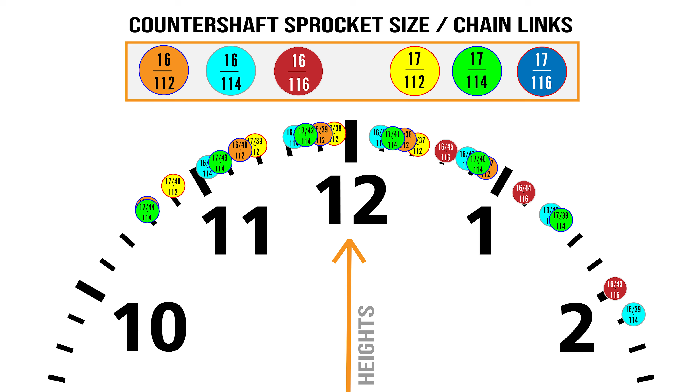You can change your gearing, because the rear axle is inside of an eccentric hub. On Superduke.com you can look at all the data sheets that I have for the Gen 3 and the Gen 4 on how changing the position of that rear axle, because it's on an eccentric, will also change the rear height of your bike. So you could theoretically, I don't have the Gen 2 mapped up. I probably should do that. But I got enough projects right now that I'm never going to make $1 from. So let me just get through this first, right?

So by changing the position of that rear axle, you're also raising and lowering the rear of the bike. And the way the bike comes stock is at the lowest in the rear that it can be. And then if you got a longer chain, I think it comes at a 112. If you got a 114 link chain, don't even change your sprockets. You'd have to turn the axle back more. And as soon as you start going back, you also go down. And when the axle goes down, the rear height goes up, because the axle is connected to the tire, which is touching the ground. So the axle is never going to get closer to the ground. It's directly connected. So the bike goes up and down above the axle.

So if you want to adjust, you can change your trail that way. You can't change it a lot, a couple of millimeters, right? But you can make a difference. Well, it's worth a try, right? The only other way to do it is with adjustable offset triple clamps, which are trick as hell.

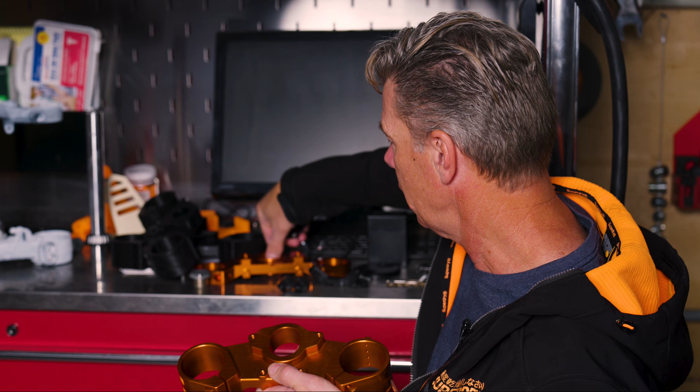So this is an insert. This is one of 7 inserts that fit this hole in the lower triple clamp. There's an equal sized insert that fits the upper triple clamp, but let's just show one side, right? So there's 7 different ones of these inserts that all have this hole in a different place inside of this oval. So when you change the placement of that hole, well, actually, the oval sits like this, right? I made it so you can read the numbers, the offset that you have underneath, because that's where you view it from the bike, right?

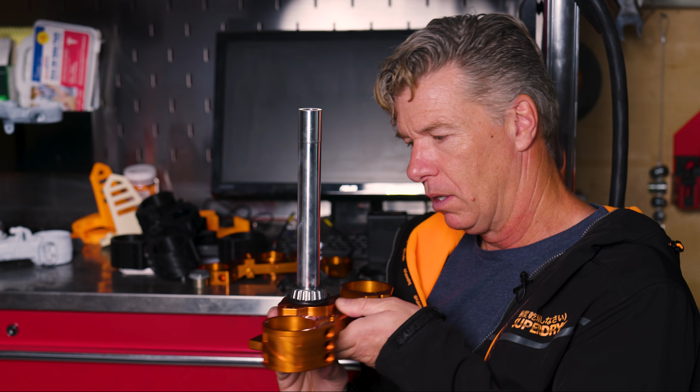But so if the insert goes in like this, your steering stem goes into that hole. See like that? Now, this is your offset. If you could draw a line through the middle of this fork and the middle of this fork, there will be a line going straight across, right? Then if you could draw another line parallel through the middle of this steering stem, the offset is the distance between those 2 parallel lines.

And the offset of your triple clamps has a huge impact on how your bike responds to you, how the bike feels, because your offset affects your trail. So you can have a motorcycle, right? I do it with my fingers. You can have a motorcycle that's sitting on the pavement, on its wheels, and that's its attitude, right? The chassis, like if you drew a line through the whole chassis, that's about where it is. If you jacked up the rear, like this, now that's the attitude of the chassis, and it's kind of aggressive and it's more leaning forward.

When you put a sport link on a Superduke, you increase the rear, you make it a little more aggressive. When the bike is a little more aggressive like this, when the attitude is a little steeper, when you have less trail, the bike responds easier to you. It responds without fighting you.

Okay, so people rave about how the Tuono handles. People rave about how the KTM RC8C handles. Ducati's winning World Superbike and MotoGP, they're just dominating everything. And their new Superbike, the street bike, the Panigale, whatever the hell it is, people love the way it handles. You know how much trail it has? 98 millimeters of trail. And the RC8C, 99 millimeters of trail. And the Tuono, I think it's 100 or 101. All the bikes that people are raving about the way they handle are all around 100.

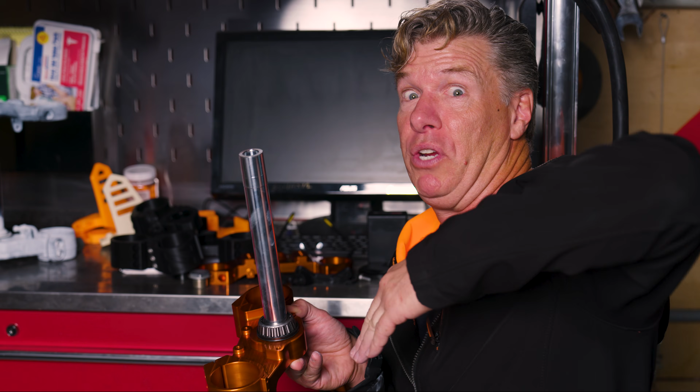So now we're in a situation where we can, where did all this stuff go? With our adjustable offset insert, we can change where the steering stem is relative to where the forks are, and that's changing our trail. The bike doesn't have to go down. No more do we have to have the chassis on this angle, or the rear of the bike so high. If that was the only way to adjust your trail, people with shorter legs could never ride a bike with less trail because they could never reach the floor.

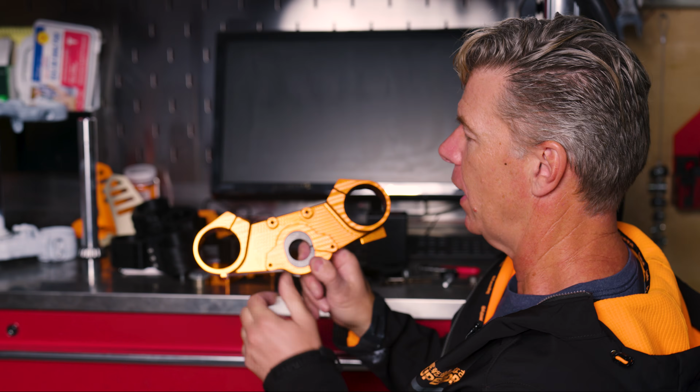So now, people with shorter legs, you can change the trail just by changing your offset. So when you do that, you can even look at this offset closely. This offset says on it +2 and OEM. So if you put this up, I'll put it in upside down. If you put it in like this, okay, plus means like I made plus, where it's like increased performance.

So +2 is adding 2 millimeters to your offset, which, it's opposite, reduces your trail 2 millimeters. That's why I make a plus, because it's like performance, like you added performance. You just made the reactions of your bike beneficial, like it's a positive 2 millimeters. But if you take this out and flip it over and put it back in, you just change the location of that hole.

I think the +1 insert, the hole is exactly in the middle of the oval. So it doesn't matter if you put that in like this or like this, it only has one offset because that's the way I designed it to be. So then there's the +2, +3, +4, +5. There's like 7 inserts, and most of the inserts have 2 positions. You just rotate it around. So that's really, really cool and really advanced.

And some people with a Gen 2 Superduke that understood what adjustable offset triple clamps do really wanted me to make Super Clamps for the earlier bikes, for the Gen 2. So I did an agreement online to say, if 10 people sign up, I'll make them. And only like 4 or 5 people signed up. And because I'm an extra idiot, I'm not just an idiot, I'm like an extra idiot, I created a sign-up sheet for people with the Gen 1 or Gen 2 triple clamps. Like anyone from 2014 to 2019, if you want a Super Clamp, I'll make one for you.

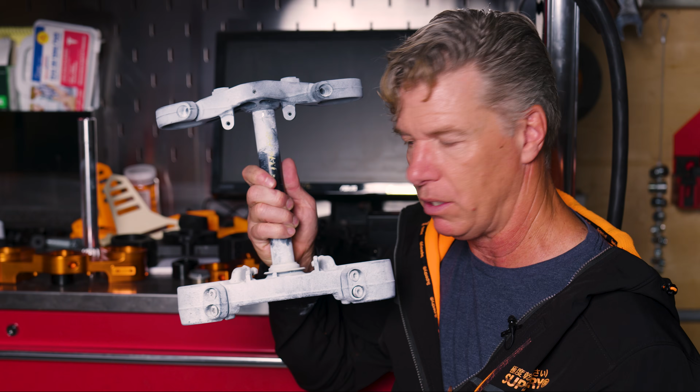Okay, so check this out. Look how different. This is a triple clamp for a Gen 2. What is this hole? What the hell is that? And these brackets. This does not exist. This is the Gen 3 and 4. There's no hole in the middle. Now, this is the Gen 1 triple clamp. There's no hole. Where's the hole?

For some reason, KTM, only in the 2017 to 2019, made the brake line go from your brake lever to here and bolt into the triple clamp. Fluid goes through the triple clamp, and then the banjo bolts down here, there's 2 of them. One goes to one caliper, one goes to the other caliper. So the triple clamps are an integral part of your brakes, of your brake lines.

So I said, well, if 10 people sign up for the Gen 1 and Gen 2, I'll make them. What a moron, because I have to make completely different Super Clamps for the first generation and then for the second generation. So I'm an idiot, but I also have some integrity and honor, and it was right for you to trust me because it was a pretty big leap of faith, and I both respect and appreciate you for it. And that's why I dedicated myself to make it happen. And here it has happened.

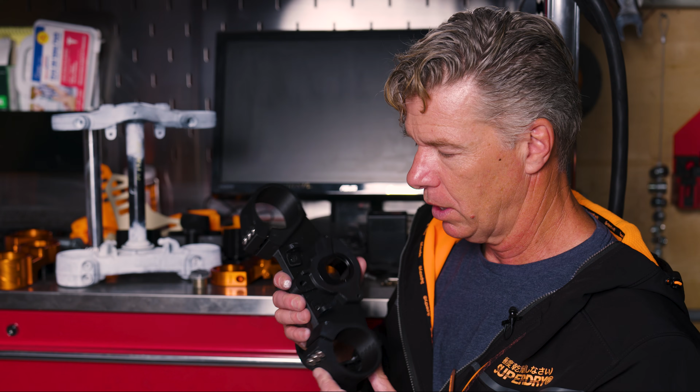So here is the Gen 2 Super Clamp. Here are the brake lines. I made this little piece here. So you put your brake line on, and when you tighten the banjo bolt, the shoulder of the bolt hits this little ledge, and this will hold it just like the OEM one has that little curve right there to keep the banjo from spinning.

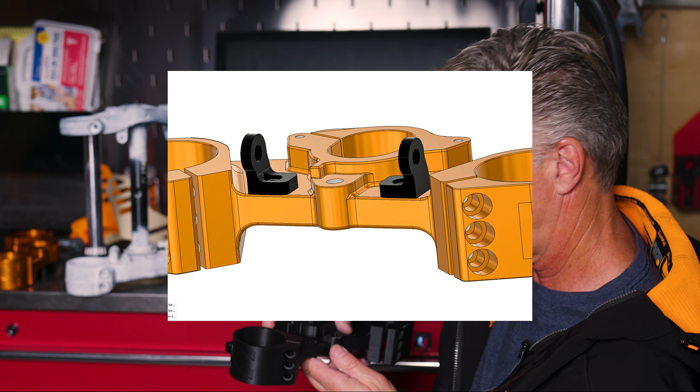Then if you also look, the Gen 2 has these brackets here that stick up for the headlight, right? The headlight kind of leans like this. There are these pins that go in here and help hold it, and then the headlight bolts in 1, 2, 3 places up there. So for the solution here, if you look at the triple clamp this way, it has to be machined out of a big hunk of aluminum.

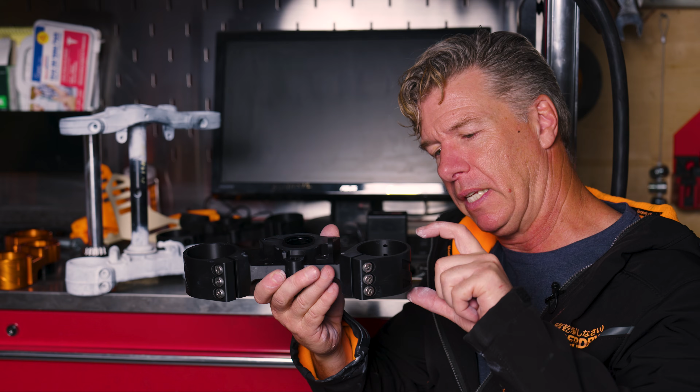So if it's just the triple clamp, the hunk of aluminum is only this big, and it's 7075 T6 aluminum, so it's expensive, strong aluminum. So this is the size, but as soon as you put these things here, oh boy, look how much bigger the block of aluminum has to be. And then you gotta mill all this material away, all that material is just for that.

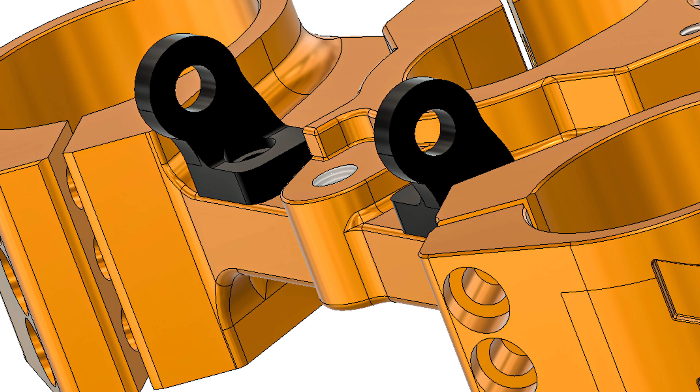So instead of doing it that way, I designed these little brackets that do it in 2 pieces. So there's a hole and there's a pin. You put the pin in the hole like that, and then there's a bolt. We just tighten the bolt. And now here's our little bracket for the headlight. Same thing on the other side. See the little pin and the hole? These are 3D printed. Don't worry, the real part is not 3D printed.

By the way, if you design things and make prototypes, you really should have a 3D printer, because when I made the original Superclamp, I had to pay $1,200 to get one lower and upper made, one. And it didn't really work that great. I had to make a lot of changes to the design, that David was so kind to help me with, to make it fit the Superduke, so I had to do that 2 times. And then I started making them out of wood myself. I probably made 30 Superclamps before I actually made one to sell. So now I can 3D print them and test fit them.

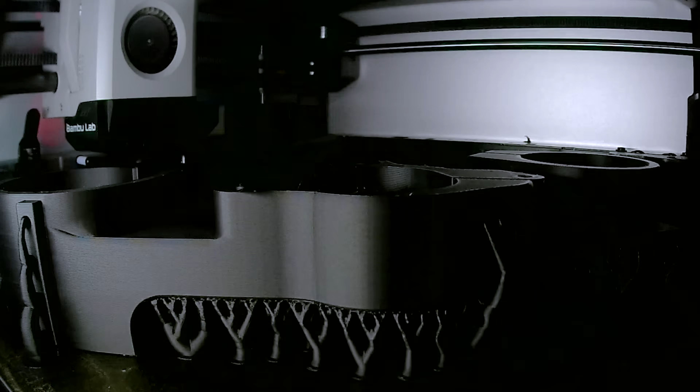So I have test fit this on a Gen2 Superduke, which Taco owns at Kawamoto. He's been helping me with some mechanical stuff and fixing my race bike, the Gen3. So this has been on his bike and it works. But what about the upper? The upper is tricky.

I really wanted to, and I emailed you guys, find a way to use the Gen 3 lower, the Gen 3 and Gen 4, modify it somehow, so that you would have a Superclamp for your Gen 2 that, when you sold the bike, you could take your triple clamp with you if you move up to a Gen 3 or Gen 4. Couldn't do it. It's too different. The brake line thing broke my balls.

So I would like to try to do the same thing with the upper, at least, right? So if you ever moved up, the idea was you could call me and be like, hey, I just need a lower for a Gen 3 because I'm moving up from a Gen 2 to Gen 3. And I'll just sell you a lower. So how am I going to do this?

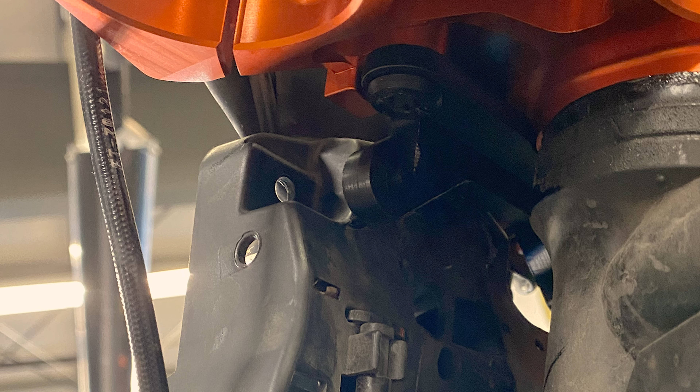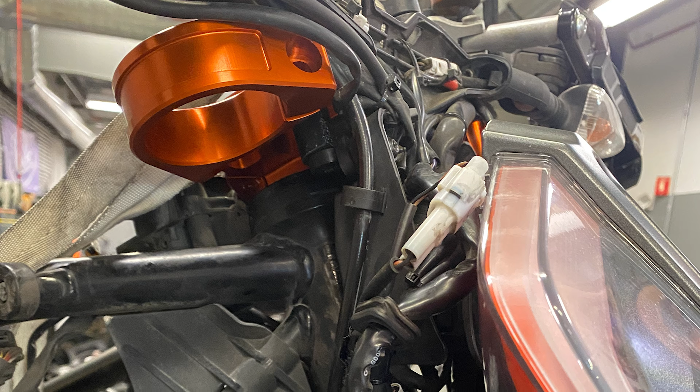The Gen 2 headlight bucket is like a black plastic dish or bucket that has all the wires and everything inside of it. And then the headlight goes in front of that, so you don't see the wires and all the ugly stuff. That little bucket goes onto the bottom of the triple clamp with these 2 little pins, and it works perfectly with these. And then it goes up here and it bolts.

Look at this. This is the Gen 3. Already had a hole there. So the hole hasn't changed. It works perfectly. So one bolt goes there. But that headlight bucket also has a hole here and a hole here. How the hell do we do that? It took me forever.

At first I designed this. If you look under here, if you have a Gen 3, there's inserts that screw into here with a special accommodation for the Gen 3 headlight. If you have a Gen 4, you take off this insert, you put a different insert, then it works with the Gen 4 headlight. Great, same triple clamp, 2 bikes.

Well, I designed this, okay? My idea was put this in here like this, and now we have a place for the 2 holes. Great. Only the headlight bucket has these vertical slats, and it hit and interfered here and it didn't work. It was a disaster. So, after hours and hours and hours, I finally came up with a solution that does work.

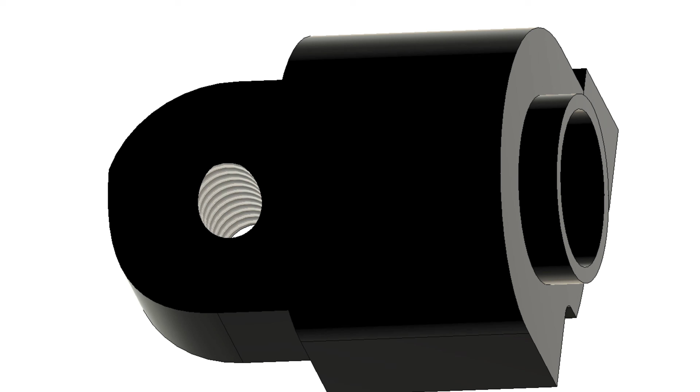This. Just like the Gen 3 and the Gen 4 have the inserts that screw into this, I made this bracket, which is a very special shape, and it goes into this little hole. See, there's an extrusion right here, so it fits right in there perfectly, tight, not going anywhere. Obviously, you're gonna bolt it too, so here's the bolt. You just bolt it into the same hole that the Gen 3 and the Gen 4 use.

Now it's in. There you go. There's one of the buck teeth, and then here's the other one. So let's say I put the other one in real quick.

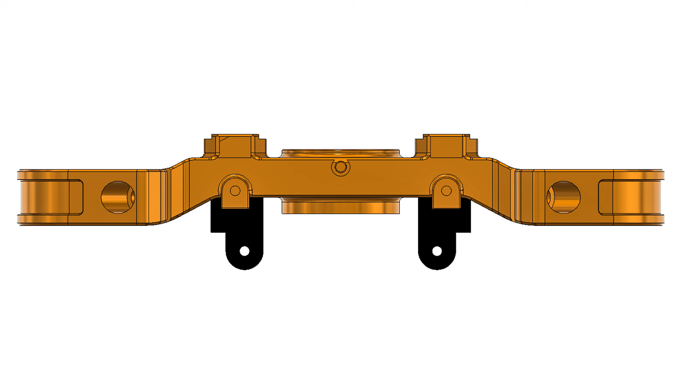This is cool. There you go. Now look at the difference. See that? It's perfect. The holes line up perfectly, and it's stronger than an ox. These brackets are 3D printed, but now it's like 1 hour until I actually say go to the machinist to make these. And there you go. The Gen 2 Superclamp is going to work.

There's one last little detail that's just a pain in my ass. It's not a problem. It's just a pain in my ass. So what that is, remember I talked about the top and the bottom have inserts, right? So this is the insert for the top. Getting down. It's got to be kind of a snug fit. So that's good. So there you go. And this triple clamp is in the OEM position. So OEM forward. Great.

So the steering stem would come up here like this, and then on the Gen 3 and the Gen 4, which is what this is designed to work with, you use the OEM bolt. It's kind of a fat bolt with an Allen head socket inside of it, and that screws in, and there's a little washer, and what it does is when you screw, it goes burp, burp, burp. It pushes the top triple down so that the bearings seat just right.